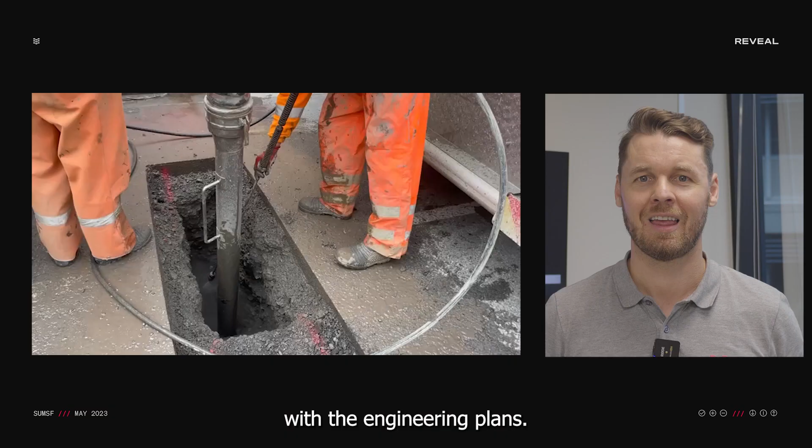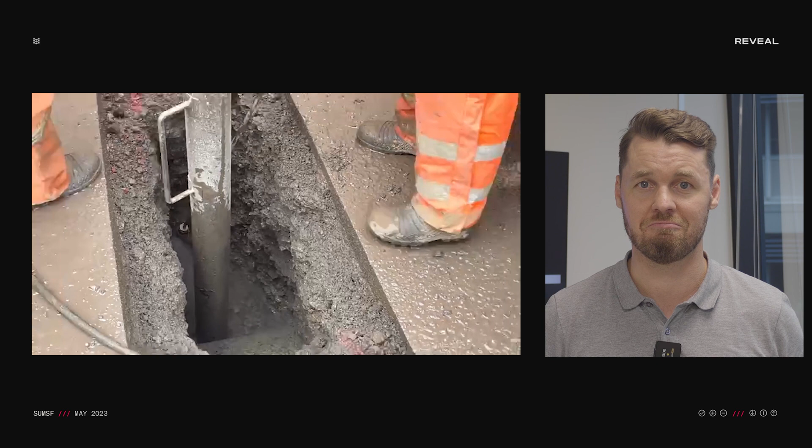From there, the engineer or project manager in charge will sometimes commission invasive drilling or potholing to confirm the presence of utilities, or simply leave it up to the contractor to conduct the investigation. In this paradigm, utilities are a nuisance, an afterthought, and often both.

At Reveal, we take a different approach. We've created a platform that puts information about the subsurface at the forefront of decision making. We want to allow asset owners, engineers and contractors to take the future-focused approach they are calling out for and think innovatively about the way they work with the underground. And it's our tools and workflows that allow them to do so.

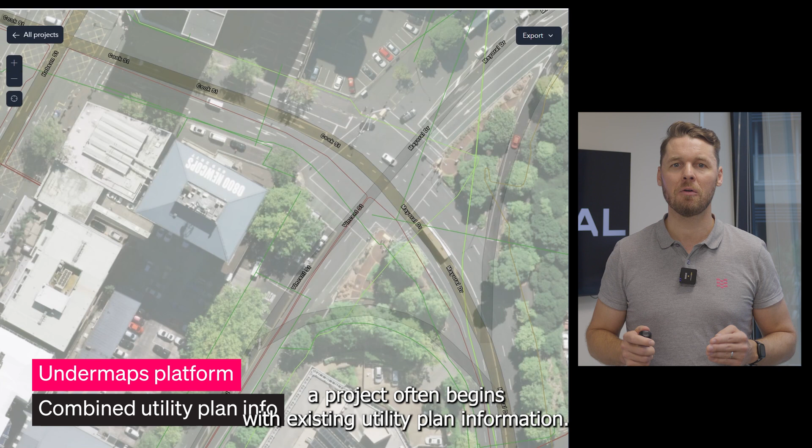For our customers, a project often begins with existing utility plan information. The Reveal platform can ingest all the existing utility plan information into its single interface, either by geo-referencing plans or importing existing GIS sources of data.

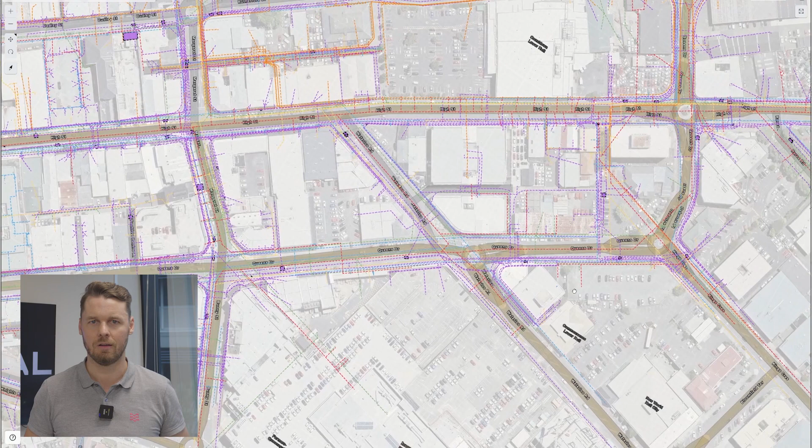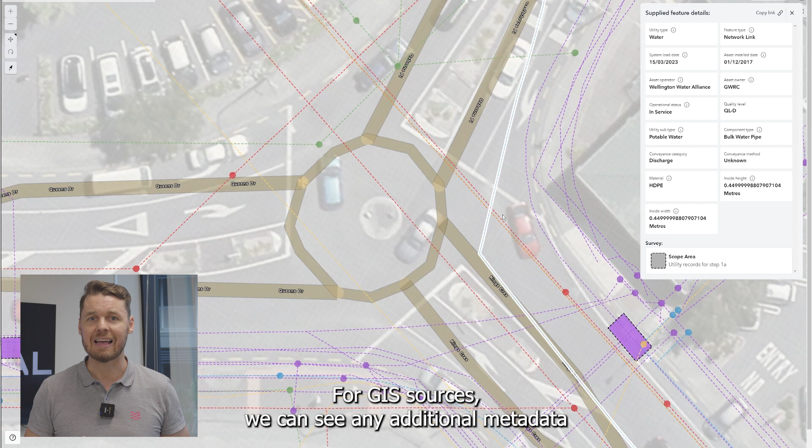In our example project here, you can see all the different utilities color-coded. We've got water, electricity, gas, and communications plans from the various utility owners, all included here as separate layers that can be turned on, turned off, or filtered. For GIS sources, we can see any additional metadata provided by the utility owner. Useful to know when it comes to finding out more about an asset's type, material, or condition.

Data ingestion into the Reveal platform follows the PAS 128 utility locating standard from the UK, which some of you will be familiar with. PAS 128 specifies the techniques that locators use to collect evidence of detection in the underground environment. Existing utility plans are one type of evidence we have to go on, but under PAS 128, they are assigned the lowest quality level grade, D. At Reveal, we typically refer to utility plans as QLD. I'll discuss the other quality levels shortly as we add more evidence of detections into our utility model.

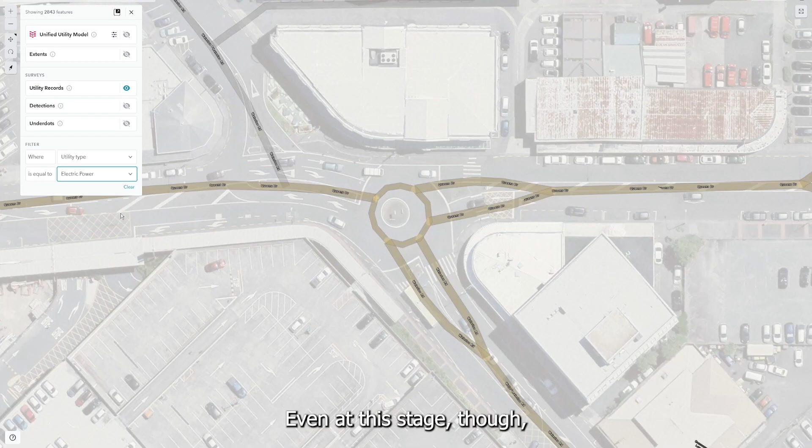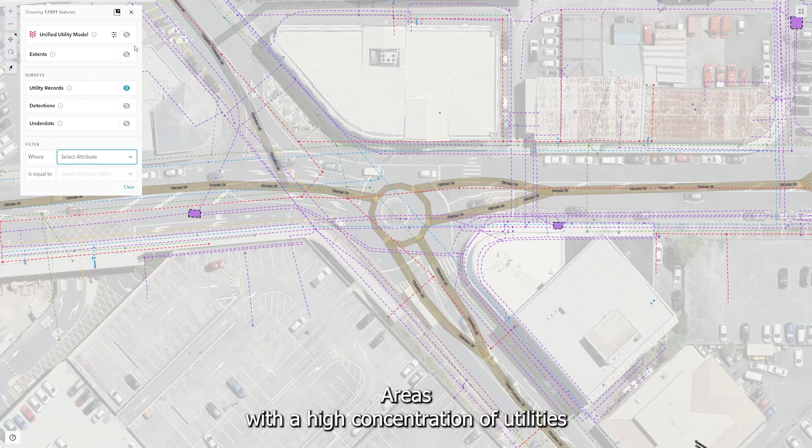Even at this stage though, just having all the utility plans consolidated in a single place and on an intuitive map interface can yield insights for the concept design. Areas with a high concentration of utilities can be identified at a glance, and designs can be modified or timelines adjusted based on the information available.

Under the PAS 128 standard, the next level of detection is called QLC, the reconnaissance of above-ground features that can be inspected visually. Typically, QLC data points would include manhole covers, grates, and catchments that can be seen from the ground. If a person on the ground can walk a site with a 360-degree camera or a drone, you can gather lots of additional information which can be used to inform the unified utility model we're building up in the Reveal platform.

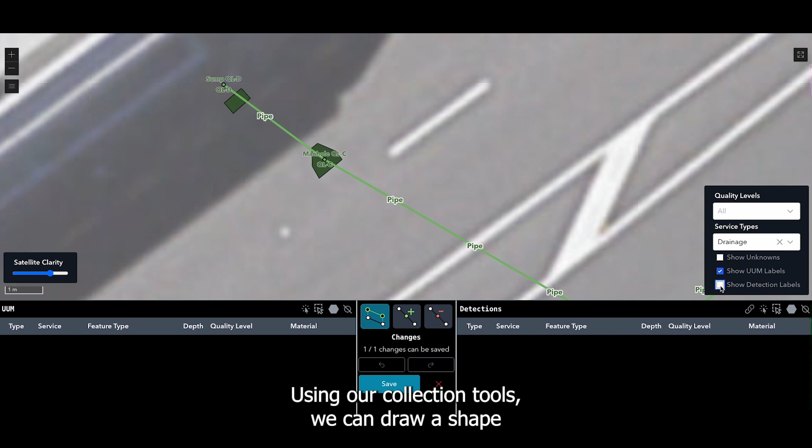Reveal's platform includes easy-to-use editing tools, so users can update the QLD information to reflect this visual evidence. For instance, in this area using aerial imagery, we can see a manhole cover here that isn't recorded on the underlying utility plan. Using our collection tools, we can draw a shape to indicate the location of this asset, tag it, and mark it on the map, so now it's part of the unified utility model. These markups can be performed by a customer or Reveal's data processing team of experienced geospatial engineers.

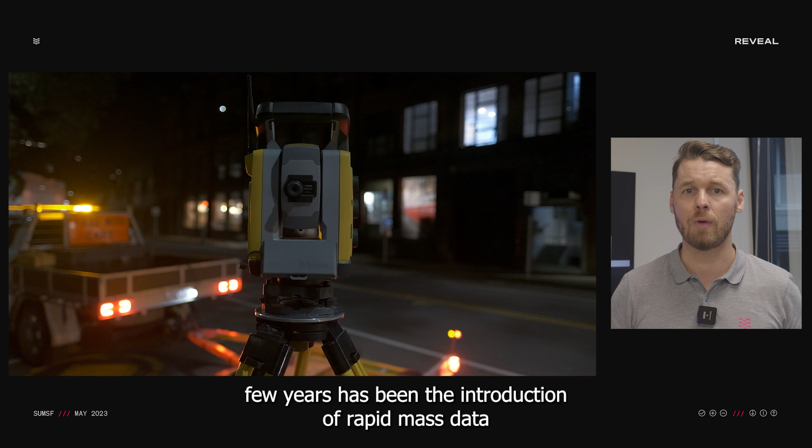One of the major advances in subsurface utility engineering over the past few years has been the introduction of rapid, mass data collection equipment like ultra-wideband radar. These units can be vehicle or even air-mounted, allowing much faster data collection in a road corridor.

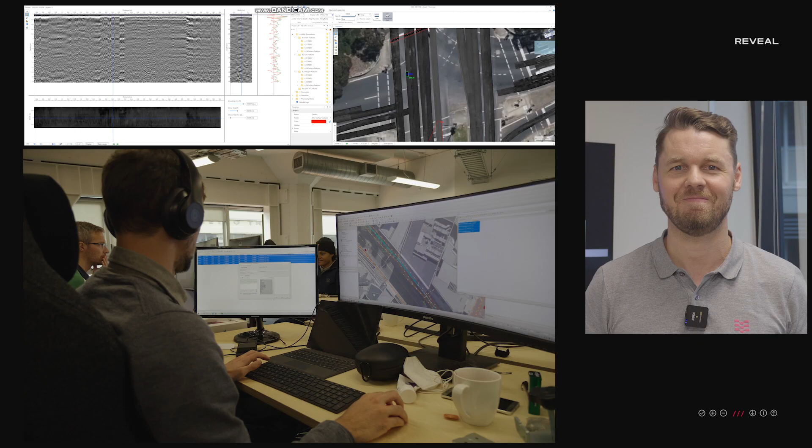Detections from ground-penetrating radar are classified as quality level B and can provide a great low-fidelity indication of the presence or absence of underground utilities. To date, the output from the radar devices has been complex and messy and required a high degree of interpretation by trained specialists to make use of the information collected.

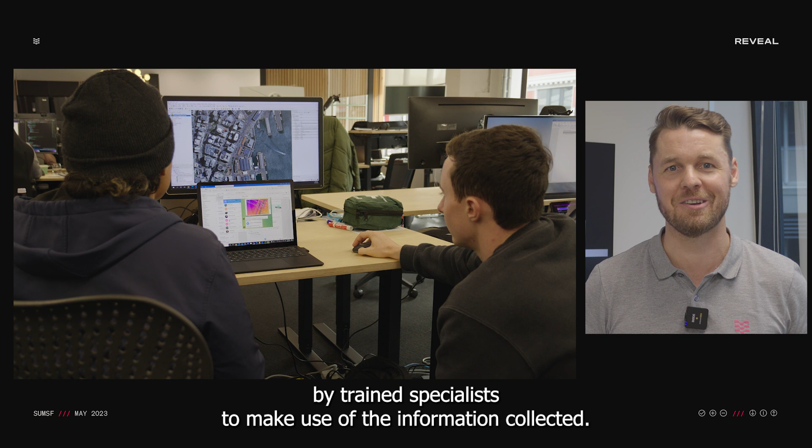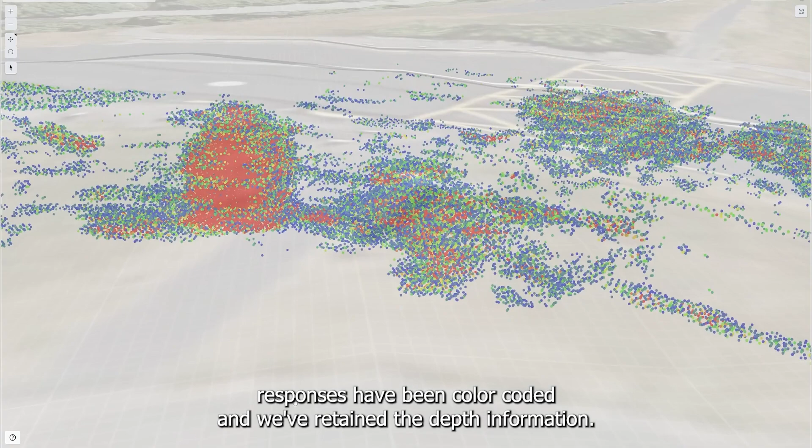Reveal has developed a suite of tools to automatically process and display radar data in a visualization that can be shown in our platform, alongside the other utility plan and marked up objects. If you're familiar with point clouds, you'll get the picture. In this area, you can see the radar signature responses have been color-coded, and we've retained the depth information, so you have a low fidelity but very fast and easy to understand method of understanding what you're looking at.

This is where the real value of the Reveal platform comes to life, through combining the different data sources together, like a mosaic, in a single interface. You can see the utility plans show there should be a large stormwater pipe going down this street. And sure enough, our point cloud data shows a large, solid object in about the same location, at a likely depth obtained from the radar detection.

For our engineer customers, being able to see the correspondence between the theoretical plans and the survey evidence is fantastic. For projects with a limited investigations budget, you could mark this area as low risk, i.e., we're reasonably confident there's an object there and we know what it is.

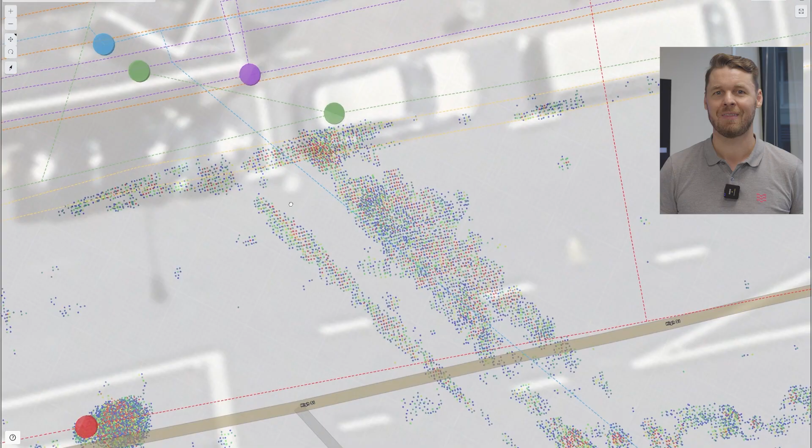Further down the road, you can see radar has detected something, but there's no corresponding record on a utility plan in that area. We don't know or can't speculate as to what it might be, either an asset that hasn't been documented, or perhaps one that was decommissioned and removed from the plans, but not actually removed from the ground. This is high risk for contractors working in the area, and a priority target for invasive potholing or investigation to identify this asset and its owner.

In this area, we can see the utility plans indicate there is an asset, but the radar hasn't found anything. This could be for many reasons. The asset might be too deep for radar to detect, or too small to return a reflection. Alternatively, the utility plans themselves could be wrong.

We do see a signal running parallel here, which looks suspiciously like the thing we're looking for. With more investigation, a choice can be made to update the unified utility model to associate this line string with the detection, while retaining the original data in a layer providing traceability to the updated unified utility model.

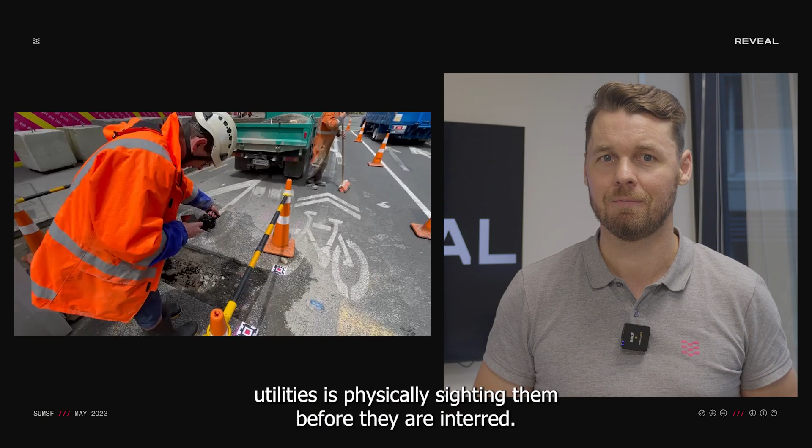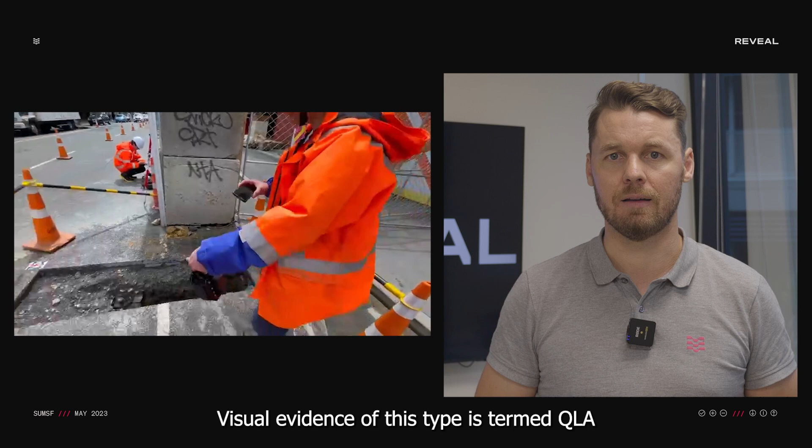The gold standard for evidence of subsurface utilities is physically sighting them before they are interred. Usually this occurs when the ground is exposed through excavation or when a new asset is being installed. Visual evidence of this type is termed QLA, with Reveal's platform also able to accommodate these data types.

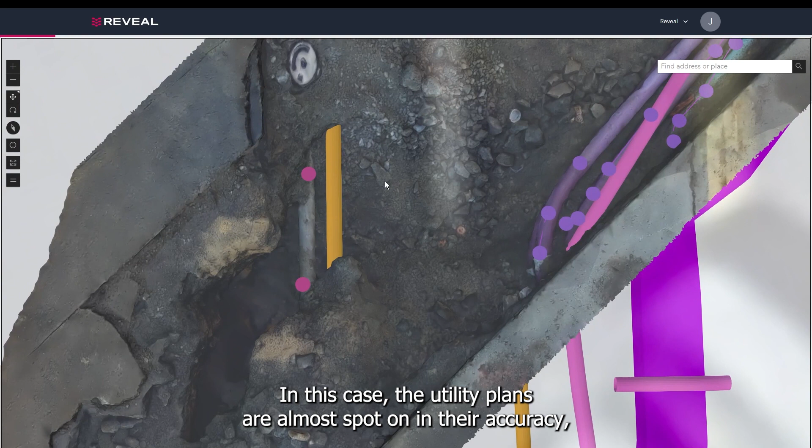Here is an example of a photogram taken during an excavation period here in Wellington. The photogram has been georeferenced in place, and you can see the connection between the visual evidence and the utility plan data. In this case, the utility plans are almost spot on in their accuracy, although with the pipe here, you can see there's still a bit of discrepancy, which we can amend.

The platform we've built at Reveal is not merely producing a snapshot in time to be referred to once and then archived. The data in the platform is designed to be editable and updatable through users interacting with the data via the viewer. As more evidence is obtained from subsurface detections, trial holes, or the eventual construction work, the unified utility model can be continually updated to reflect the best understanding of the subsurface environment, right up until construction is completed and the new physical and digital assets are handed over.

The platform demonstrated today is continually evolving. We're working directly with our customers to find out how they want to view and use the solution, informing what we build next. As a cloud-based GIS platform and database, integrations with other GIS systems or design packages that can exchange GIS data are a priority for us. We're speaking with design engineers and CAD technicians, figuring out the best way for Reveal's platform to integrate with our customers' existing tools and workflows.

As we ingest more and more data into the Reveal platform, we will build training data sets for machine learning and AI to further automate and straight-through process the data transformation and visualization that you see today. The digital platform and services we offer at Reveal are changing the way cities, asset owners, planners, designers, engineers, surveyors, and other actors involved in the world of the subsurface are thinking about utilities and their underground assets. It's an exciting journey and trajectory we're on as we drive a safer, more efficient and sustainable world as the go-to platform for insights on subsurface infrastructure, revealing the truth of the subsurface world.